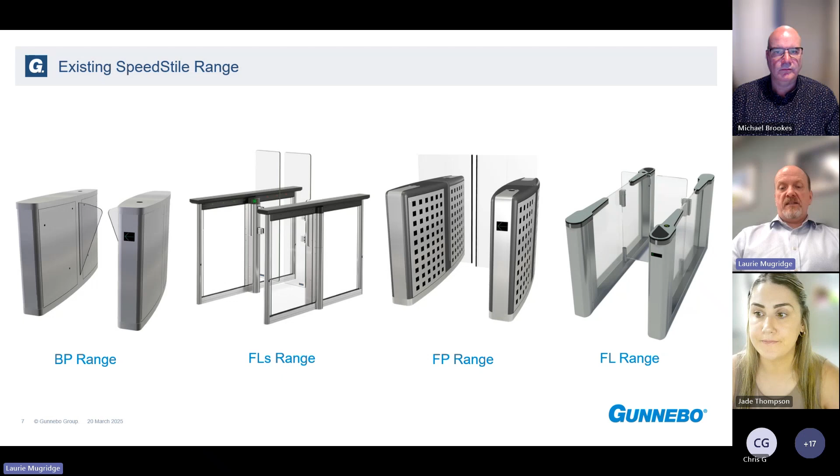So, FLS there, and we've got the FP range, which is, or certainly was, the most common ones we used to sell in Australia. You'll see these all over the place - many government departments, lots of corporate offices. The FP range is very popular here, and the FL and FLS range, the swinging style, are starting to be more popular than the FP, I think because they're seen as more architecturally pleasing, but nevertheless the FP is still quite popular. So that's our existing range.

I'll go and show you a quick video of one of the new ones.

Look, these are a great looking design, very sleek looking cabinets, quite edgy with the cutaway there. Can you tell me where the readers go? The readers in the picture, you can see there's a slightly angled piece at the face, at the top of the end leg there. The reader actually goes under there, and this design has been specifically angled like this.

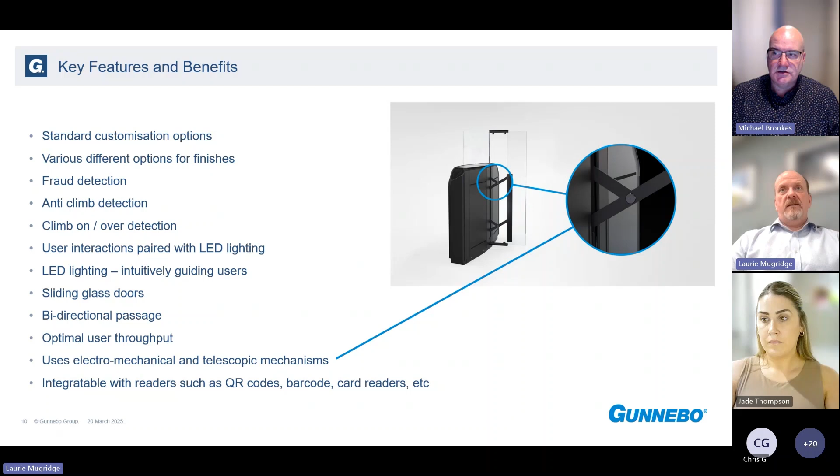So I'll have to clarify that, but definitely above the cabinet height, yes. Good question, Paula. Thank you. All right, Laurie, let's move on to the next one.

Okay, just a few sizes and things here, which I'll just skim over. One other point I will mention, though, the new FP Glide has a brand new Gunnebo Electronics platform, which is the main feature of it. It's got far more detection and better algorithms because it's got 32 sensors in it for detecting transit, which is more than double any of our other Speedstiles.

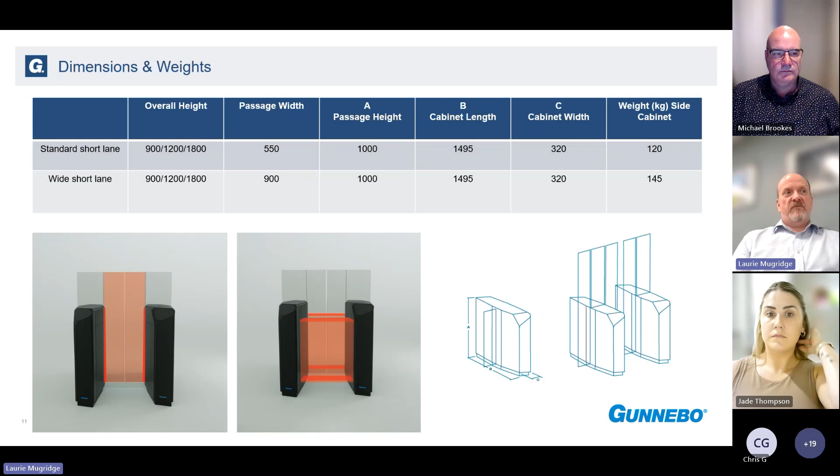So this is kind of a next generation electronics, many more sensors. It also has things like time of flight sensors, so as someone approaches, it can sense you and illuminate where to badge your card, all those kinds of things. So it's much more advanced, this new product, and that's coming out in some of these new products. So much newer electronics.

Okay, now I haven't got a video for this one because this is very new. In fact, we're waiting to receive our first one, so we haven't actually physically seen that in Australia just yet. So this is brand new. This is FLDS.

Just click onto the next slide. So again, FLDS, we've added more lighting effects, and you can see on the top left one where you've got the little white rectangle which shows where the card reader is. So again, this is basically taking our existing FL and putting a brand new casework on it, making it a bit more curved and architecturally pleasing, with more lighting.

Other than that, it's pretty much identical to the current one. But you can see here, top left, that's what it looks like with authorized passage. You've got the dynamic lighting showing the green striping down the cabinet, showing the direction of travel. And then the units in alarm, you can see even the wings get red lights on the top, so it's clear which lane is alarming. Just in standby, you've just got standby lighting in the bottom left there.

And we also have the ability to do some customizations. I don't know how clear it is, but these aren't a solid light, it's actually almost chevron style lighting in that strip that's striping along. So we can do some customizations as well, if required.

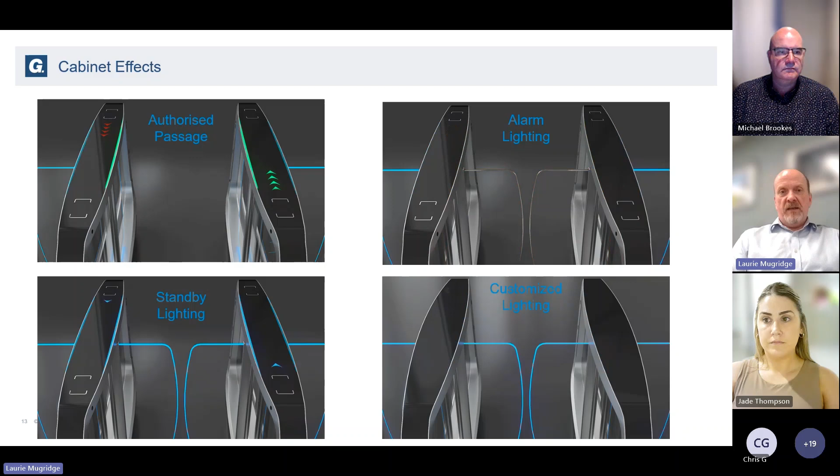So that's just a few views of what it looks like. Again, as mentioned, it's highly customizable with all the LED lighting, slim cabinet, and yeah, it's just meant to be a much more aesthetically and architecturally pleasing version of the FL. So that's brand new, coming very soon.

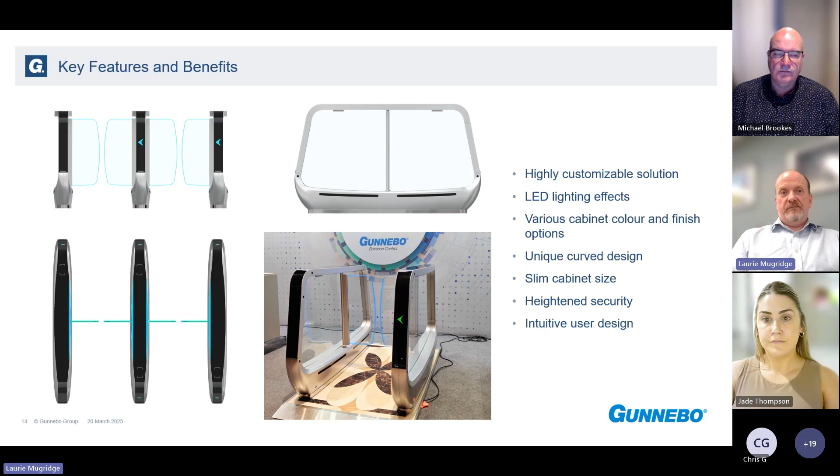It's just got some sizes, so the sizes are all the same. With all of our Speedstiles, we do a standard user width of 550 to 600 wide for a standard lane, and a wide lane is 900 to a meter, depending on requirements. Again, all of our Speedstiles have those options.

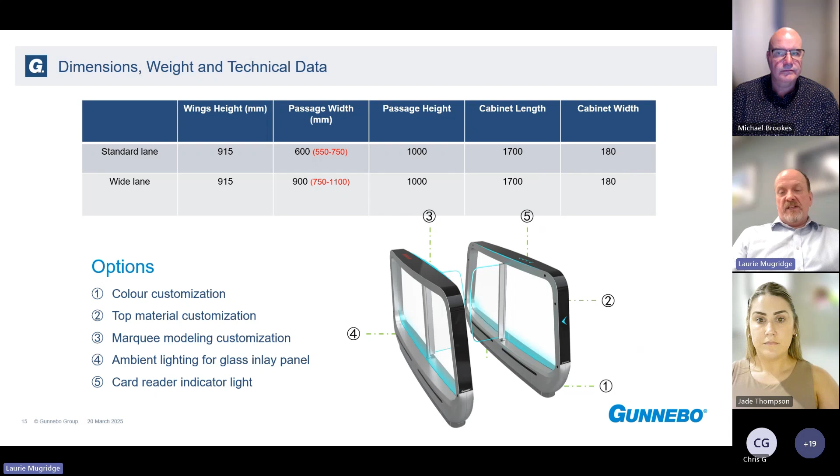And here's some examples of all the customizations of the cabinets. You can have all sorts of different colors just to tie in. This is something we get asked about quite a lot, Laurie, where we're asked to customize lid designs and so on, various ways, shapes and forms. These things are pretty much ultimately customizable, yeah?

Yeah, that's the idea. We get so many requests, can we make this color match this, and so on. I mean, we can powder coat our existing gates, but this one is designed to have inlays in all sorts of different colors and materials to try and give as much flexibility as possible. Yeah, they're great looking gates. Yes, they do look good.

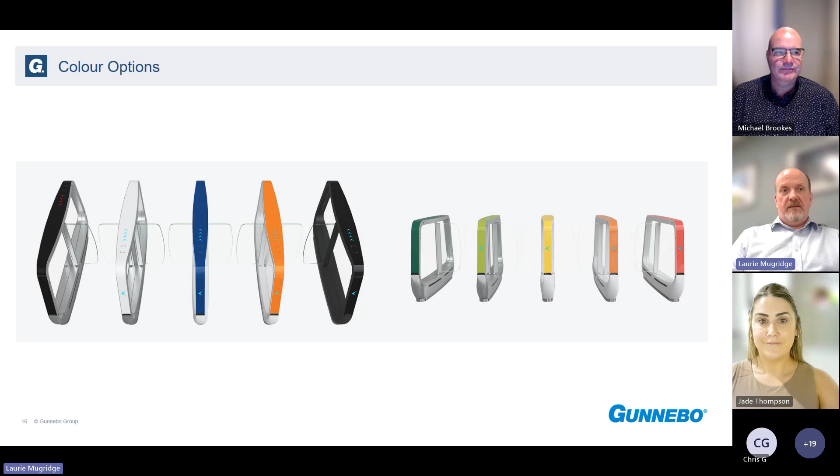Okay, so I'll just go on to the next one.

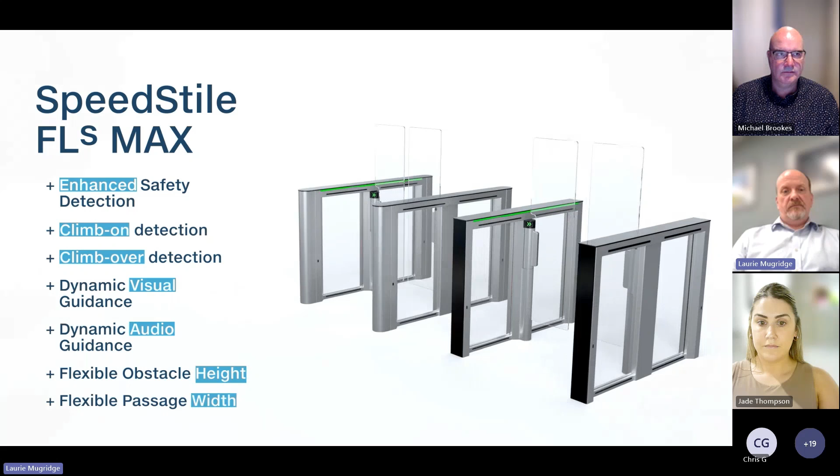Now, Laurie, just before you go on to talk about the FLS Max, I can see we've got a quick question here, which relates generally to the product range: are these products weather resistant?

The ones we're showing now, no, but I can show you in just a second. We've got something for that. So just be patient and we won't be long.

Okay, so FLS Max. Right at the beginning of the slide, we've had the FLS for quite a long time now. In fact, the FLS Max, we've done a number of installs already with these, or they're brand new, and this year we've been installing these already. So here's an example of a powder-coated black FLS Max.

So we've got the round or square ends. Now, square ends have the options of glass inlays. The round ones only have glass inlays on the top. The square ones have glass inlays on the leg and the top. It doesn't have to be glass, it can be a solid infill panel or coloured panel.

But yeah, the glass option is quite nice, especially when you put a reader under the glass - it hides the reader and makes it much nicer. And again, you can just see a little area where to badge your card.

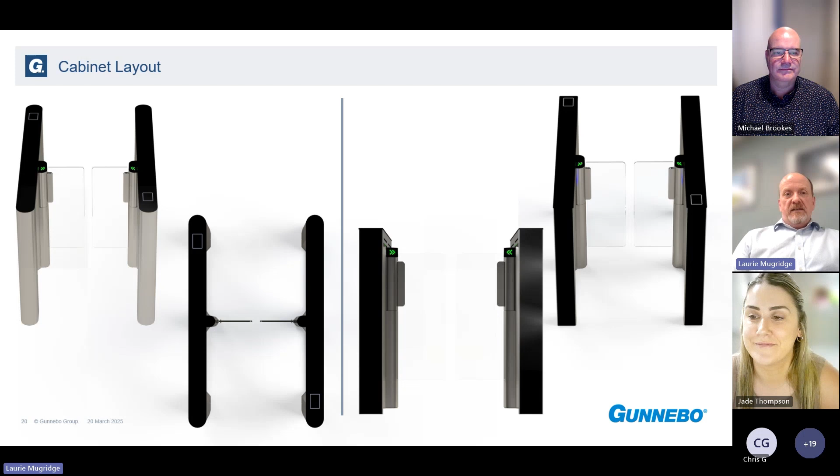Which, to be honest, I think it's one of my favourite FLS, or one of my favourite SpeedStile products for looks. I agree, I think they look great. I love the square end one - they look especially fantastic, the square end one. I think it looks really good. So yeah, that's a couple of views there of it.

And now we'll go into our outdoor range. I'm not sure who was asking about weather resistance, but we do have the option - we'll have an outdoor version of SpeedStile FL. So let's go on to that.

So we have two outdoor options and one indoor bike option. We've got the FL Outdoor, which has much better IP rating and is suitable for installations outside. The FL Bike, which is indoor but suitable for taking a bike through, which would normally cause alarms in a standard SpeedStile because it would see the bike as a potential tailgate and warn that something fraudulent might be happening. So you've got the FL Bike, and then you've got an outdoor version of the bike as well. So yes, we do now have SpeedStile suitable for outdoor.

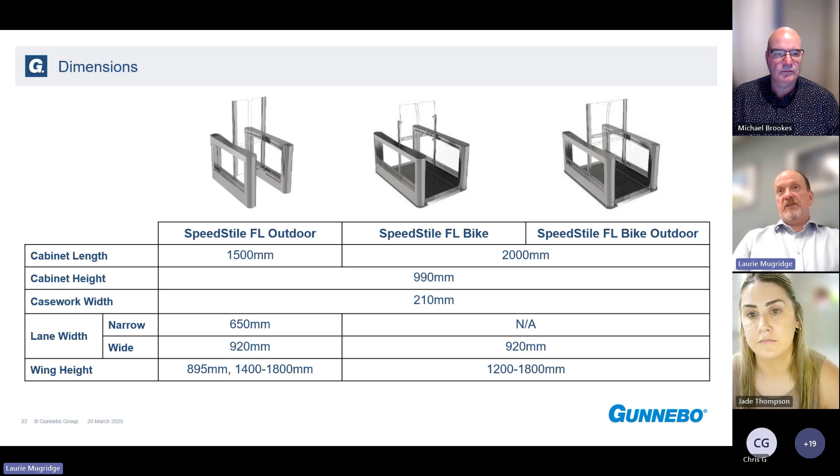Now we'll move on to our entrance gate.

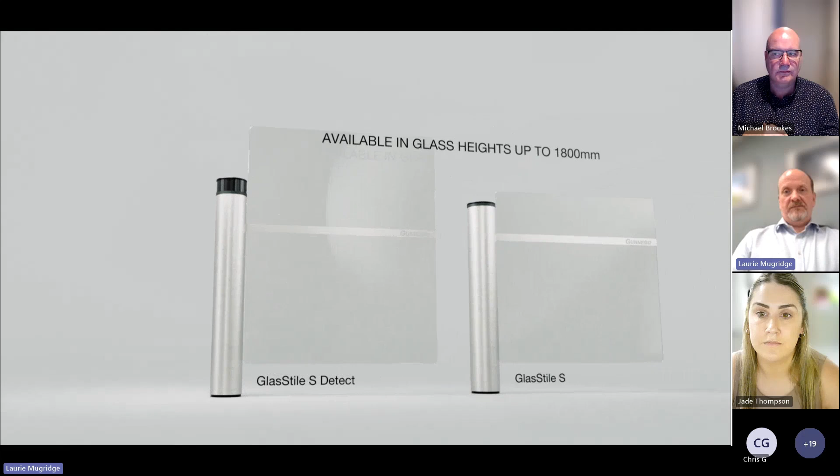Okay, so we've had the GlasStile for many years, but we've just relaunched it. It's a brand new design from the ground up.

Sorry, Laurie, just before we continue on with the GlasStile, we've just got one more question about the outdoor lane. Nicholas has asked what the number of people per hour is that can go through one outdoor SpeedStile.

Okay, now this varies. Pretty much all of our Speedstyles have the ability to do up to 40 people per minute. So if you had a push button wired to the input I mentioned, like a 1 second pulse - if you push the button and walk through, and everyone did that, they would all just flow through and the gates would never close. So you can do up to probably more than 40 if you really tried.

So we're actually reliant - no matter what you read in any manufacturer's data sheet for Speedstyles - we're completely reliant on human factors, like people dropping their bag or finding their card, and on the access control system, because when you badge your card, that's got to be verified in the database, and then the signal comes back to our gate to open. Now if the access control system is slow, that slows us down - not to do with the gate, but because it takes time to verify the database.

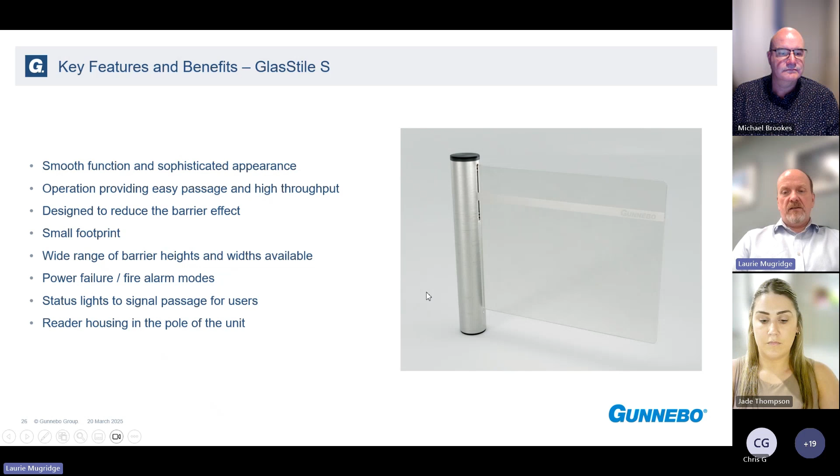And yeah, it's got all the functions of the old GlasStile. So the key things about the new one are the slim column design, new electronics, and the status indication. You can't see it here, I don't know if it's in the next slide... it's not. In the top of the cap, there is actually an LED light on each side.

So you've got a red and green traffic light effectively. When you badge your card, it will go green if you're valid. The old GlasStile didn't have those status lights or traffic lights. This new one has built-in traffic lights.

Now you have the option here of a little module on top to house a reader. This is a global product, but I'll point out that depending on where this is used, there are regulations that may mean you can't mount the reader there to comply with building standards. So that option, proceed with caution.

Like with the glass styles, we have customers that have installed these at the bottom of a set of stairs. Now you're obviously not going to have a wheelchair user at the bottom of a set of stairs going up in a wheelchair, but you still have to comply with building standards. So no matter where you use it, if it's appropriate, you probably need an exemption to use this, but it's there anyway. We have the option to add a little module on top for your card reader.

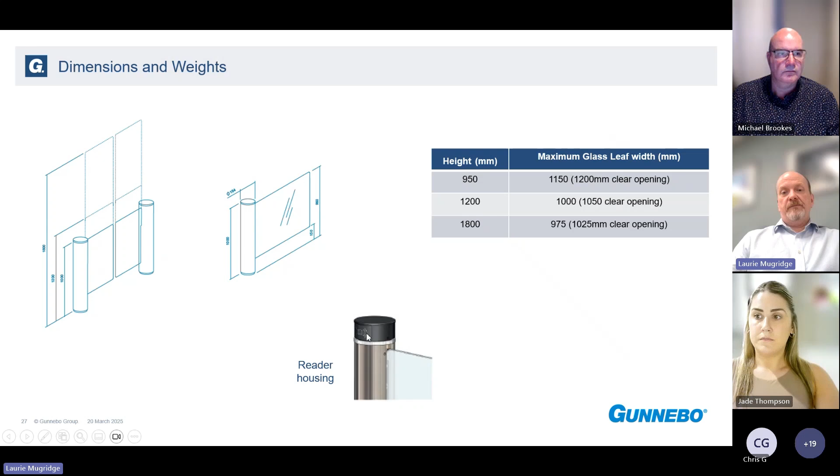Laurie, we've just got another question that goes back to the outdoor range here. Is the glass on those vandalism resistant? So it's toughened glass.

We can do polycarbonate, but the problem with that is it degrades over time. So usually we would do glass, and toughened glass is very tough. You can hit it with a hammer and the hammer will bounce off, but I don't know if you've been on a coach where you see the little pin hammer, where if you've got something sharp and you hit the glass, it just explodes.

Look, bumps and knocks, fine, but if someone wants to get through it and they know how to break the glass with something sharp, then if someone wants to break it, they're going to break it. But bangs and knocks, it's very tough. In fact, across all our SpeedStile FPs, I can't remember the last time we replaced a panel of glass. We must have 2,000-3,000 lanes of SpeedStile FP with toughened glass, and I can't remember replacing one in recent years. So they are very tough, and obviously things get banged and knocked all the time, but if someone wants to break it, it will get broken.

Now, I have a question, Laurie, with the GlasStile S-Detect. I know you said that the readers, it's sort of got to be, I guess, depending on the area and building code and so on, but can they be added later? Can the reader be added to an existing GlasStile?

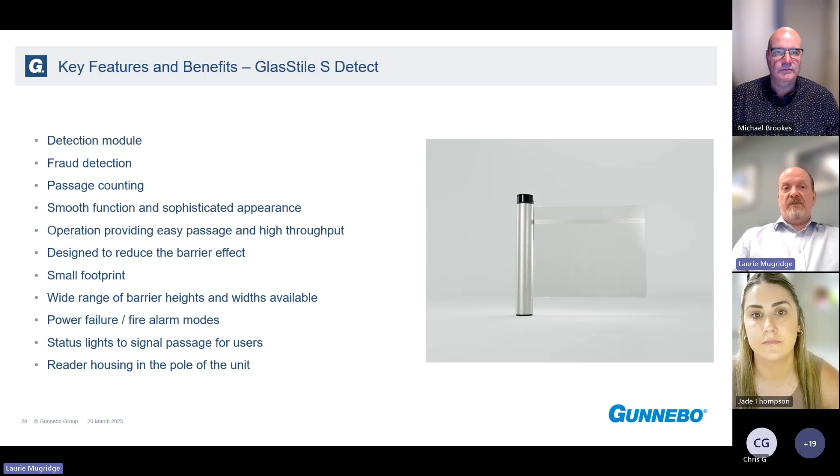Okay, now the GlasStile S-Detect. So this is brand new. We now have an option, a new product with a module for tailgating detection. It has all the same functions of the other new GlasStile S, but with the addition of a sensor system.

I'll just pop to the next screen and show you here. So we've got the detection module there. You can see the two little sensors at the front looking over the glass. That is the tailgating detection.

Now, it's not as foolproof as a SpeedStile. It's got lots and lots of sensors and a whole walkway to detect if you're one or two people, so it has its limitations obviously from the area it's got for sensing. But nevertheless, if you've got someone following behind someone with a gap, it will detect tailgating.

We've also got an option to add the reader module again to the tailgating module. In there, there's also a sensor where you can have an auto exit. So as you approach the gate, if you wanted free exit, the sensor can detect you and auto open the gate. Now, we would normally not use that, because if it's a secure area, you can have these with 1800 high glass, as you can see on the left, so people can't jump over. If you put the sensor in there, if someone puts their hand round and breaks the sensor, it will open for them coming in from the other way. So normally we would put a beam away from the gate, but it does have that option. Just thought I'd mention that.

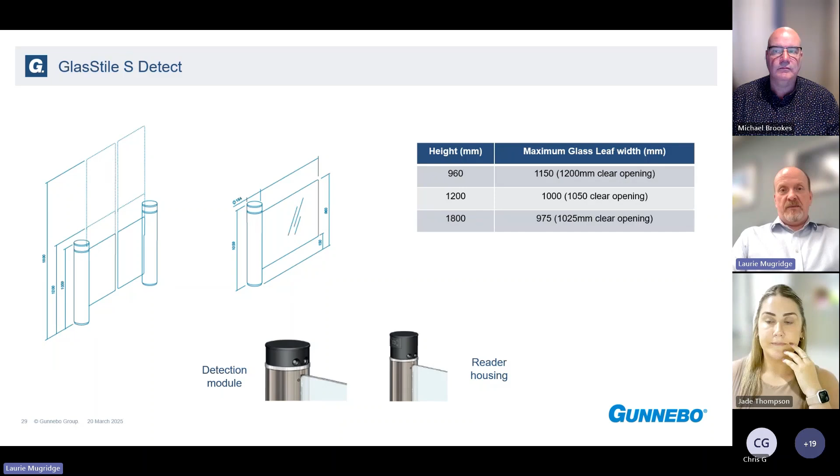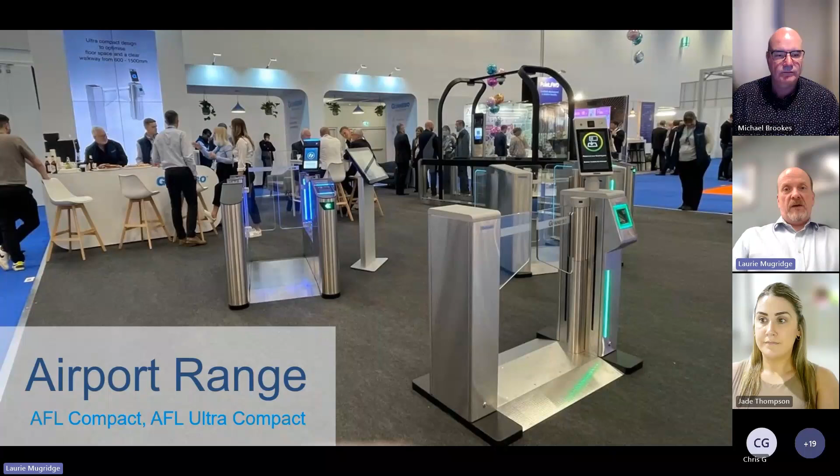Okay, moving on because I think we're running out of time. Just quickly go over the airport range. So we've got a couple of additions to our airport range. Now these gates, the reason I'm showing it is because they're not just for airports. So although it's part of our airport range, because it's designed to integrate with all the biometric systems more specifically and have other computers for airports integrated, it doesn't need all of that. So you can use these just as a SpeedStile product for any entrance, in fact. So although it's part of our airport range, in fact all of the airport products can be used anywhere, and in fact are used in many areas. So this is just a very compact SpeedStile, effectively, that you can use.

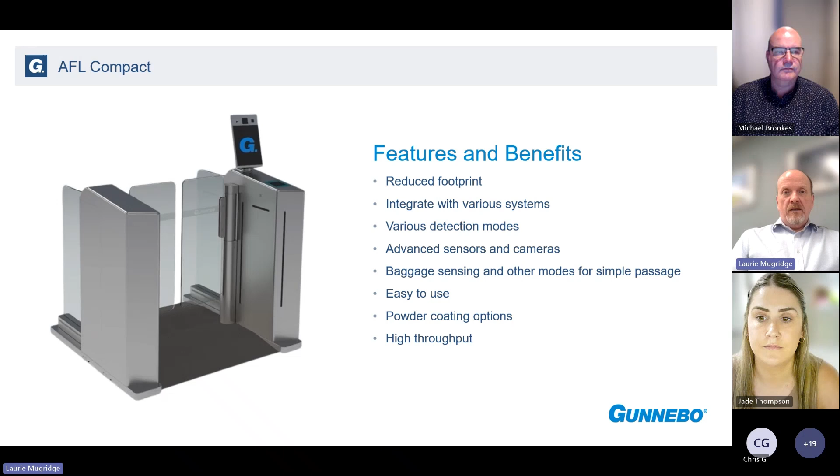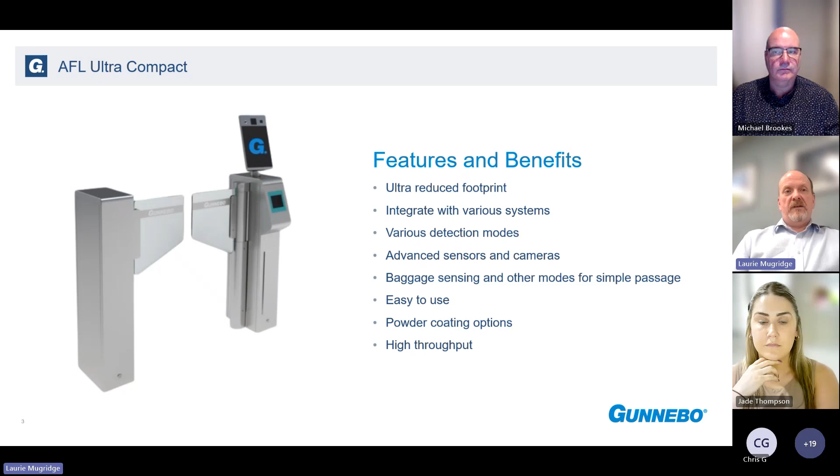And then even more, the ultra compact. So this is again smaller again, using the FLS mechanism here with the sensors - can't really see them, but the sensors are actually in the gates very close. Again, having a much smaller area, you start to limit the ability of the tailgating detection, but it will still do all of that. These ones are specially developed for baggage sensing and things like that, for pulling a bag for your airport behind as well. So just another couple of options that we thought we'd show here, even though it's more for airports, or designed for airports, we can use it anywhere.

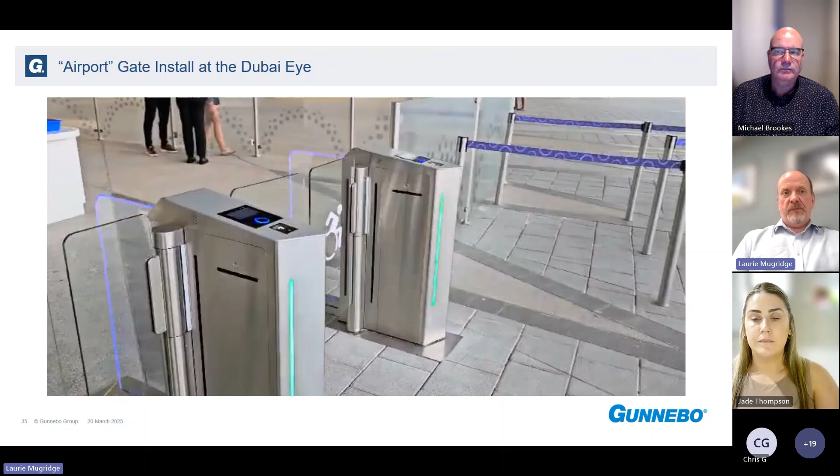All right Laurie, I've just got a quick one on the compact. So at Dubai Eye, that's obviously an outdoor location that's just very, very well covered. So are those gates okay in an outdoor environment so long as they're covered? Absolutely. So in fact, all of our turnstiles, SpeedStiles, we've got many, many of them that are outdoor, but under a canopy - usually we would have a canopy to protect them from driving rain. But all of our products, in fact I'm pretty sure all of them, are installed outside in some form or another under a canopy.

The FL Outdoor is specifically designed to be out in the rain, whereas all our others you can use outside but under a canopy. A lot of people would prefer under a canopy because when a user's coming up to use a device, if it's raining, it's much nicer to use it under cover. So you can use all of our products under a canopy as long as they're protected from direct rain, pretty much all of them are available.